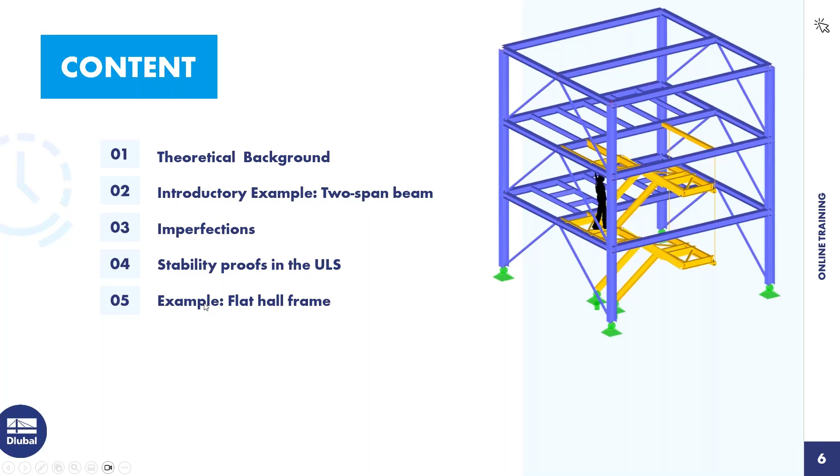So, the content for today: first I'll say something about the theoretical background. Then we start with the first example, a simple two-span beam. I'll say something about imperfections, geometrically nonlinear analysis or second order theory, and so on. Then I'll talk about the stability proofs in the ultimate limit state design. And we'll finish the online training with the second example, a flat hall frame.

Before I come to the products for design according to Eurocode 3, I have one question for you: How much experience do you have in steel design?

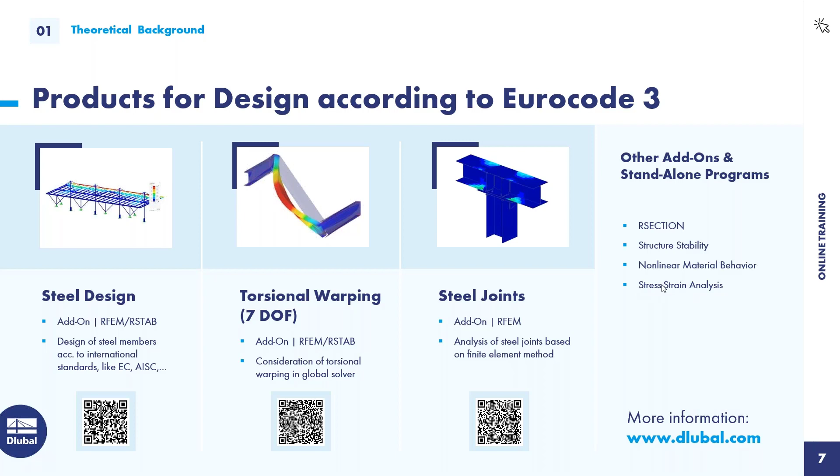Okay, a little insight into the whole safety concept in steel construction. The actions should always be smaller than the resistance. In addition, we have certain coefficients to take into account depending on the type of proof used. For example, for the stability analysis there's a different safety factor for the basic standard and the national annex of Germany - just consider the national annex of your country. But I believe in most cases it's the standard factor from the Eurocode.

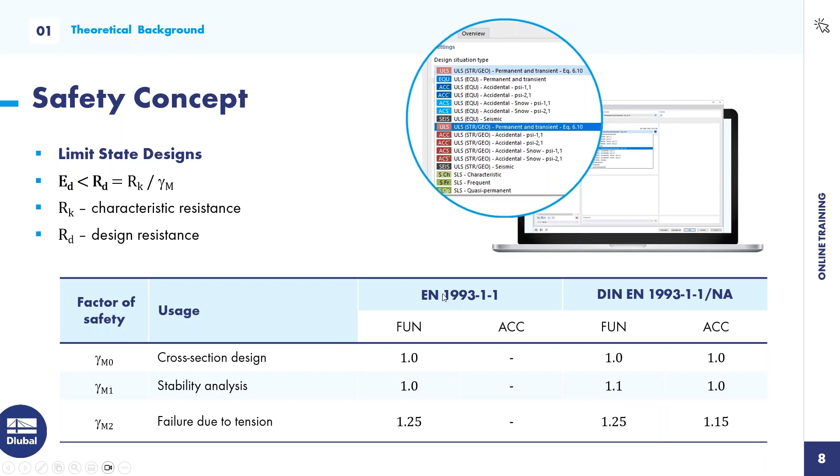Okay, then that's quite important. I will also ask you later, in the poll, about elastic or plastic global analysis. Whether an elastic or plastic calculation is possible always depends on the cross-section.

There are 4 cross-section classes. Let me introduce them. Cross-section class 1 has a high rotation capacity. This allows a plastic structural calculation, for example plastic hinges can be taken into account. Usually you won't do that - it's not so often used in practice.

In cross-section class 2, the cross-section resistance can be applied plastically. It's an economical method, but also somewhat more complex in the calculation when you use the plastic global analysis. But as I said, it's not often used - just consider that the cross-sectional resistance can be applied plastically.

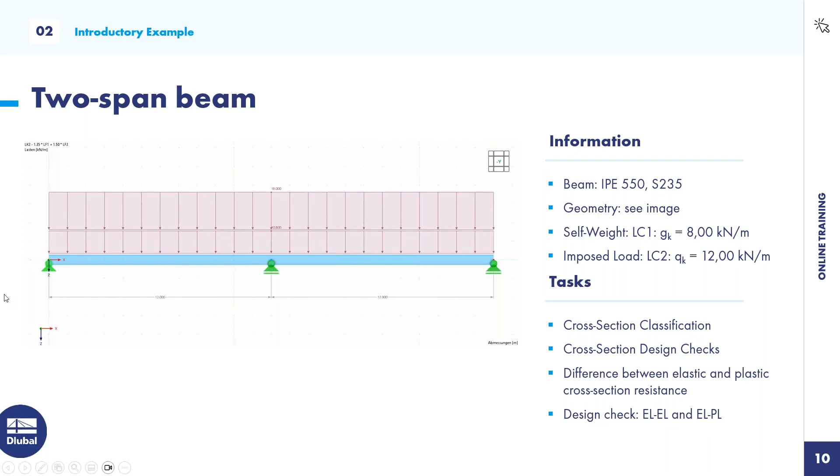Okay, let's turn to RFEM 6. I create a new file here, left above, File New. So the model name is two-span beam.

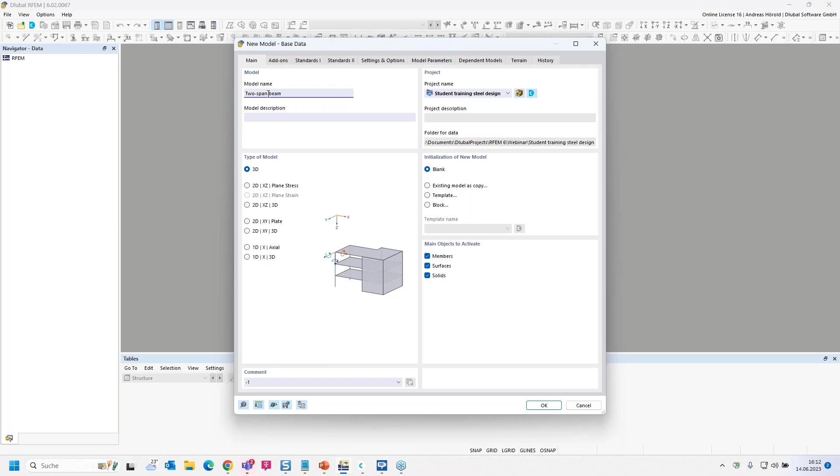I use the 2D model, that's enough for this example. It's only one beam, plane stress.

Then I activate the add-on steel design. Standards, okay, I checked the German National Annex. You can see there are also different standards available for the load case classification. I select the Eurocode and the German National Annex. The same for the load wizards, but we don't use any load wizard in this example. Doesn't matter. Then here the different standards, the international standards, as I mentioned, I use the Eurocode and the German National Annex. That's all.

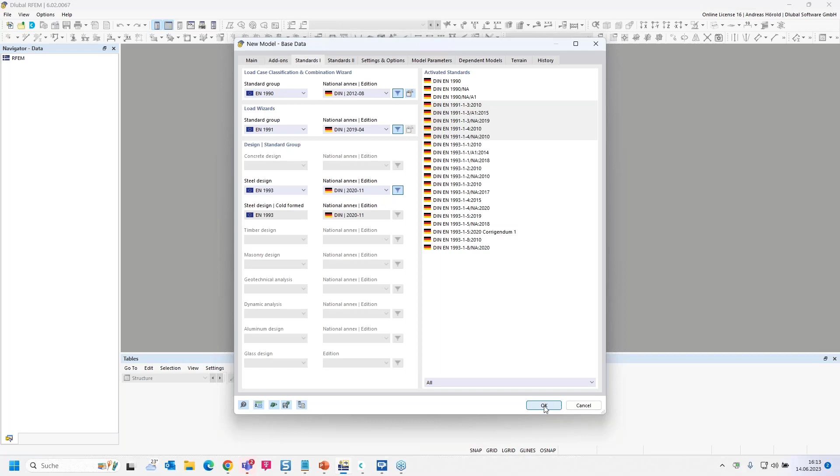Then I change the work plane or the visibility view in reverse Y direction. Zoom a little bit in. Okay, the grid, we can check the grid.

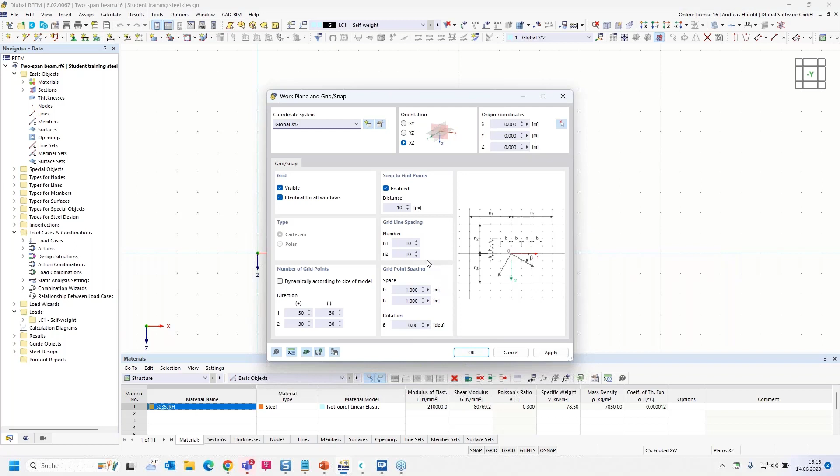The space is 1 meter, here at the bottom, grid. I open the dialog, and the grid of 1 meter is okay.

Okay, then left above, new single member. Beam is okay, then we have to define the cross section. There's already an HEB 300, and we change it with input from section library. We open the library.

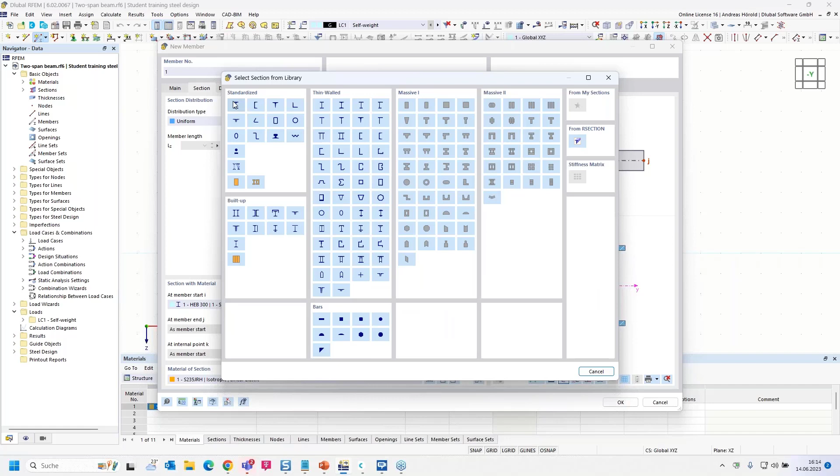Standardized, left above. And I choose, as I mentioned, for example, this one, IPE 550.

And I need to select the material. There's already S235 selected, but I open also the library.

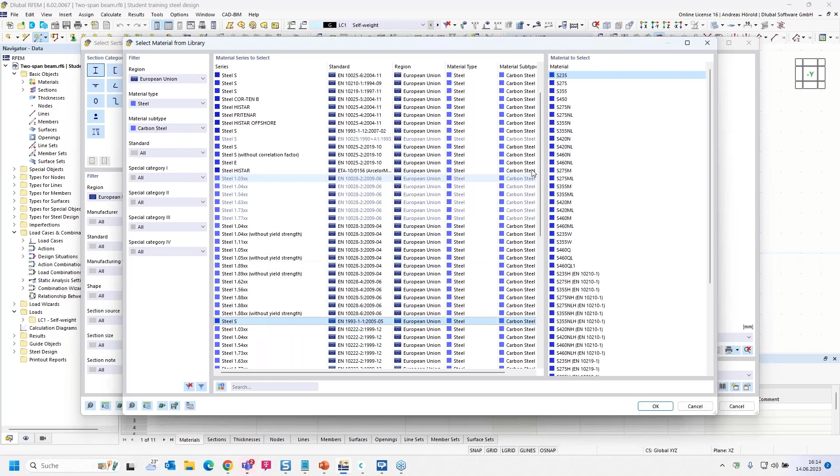So European Union is okay, steel, and I choose any steel that I want, or I check on the left side carbon steel and the simple steel S235. Okay, so that's all.

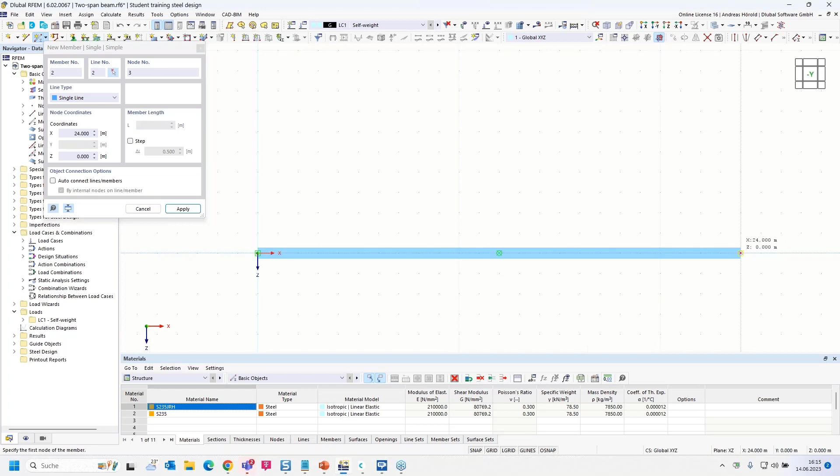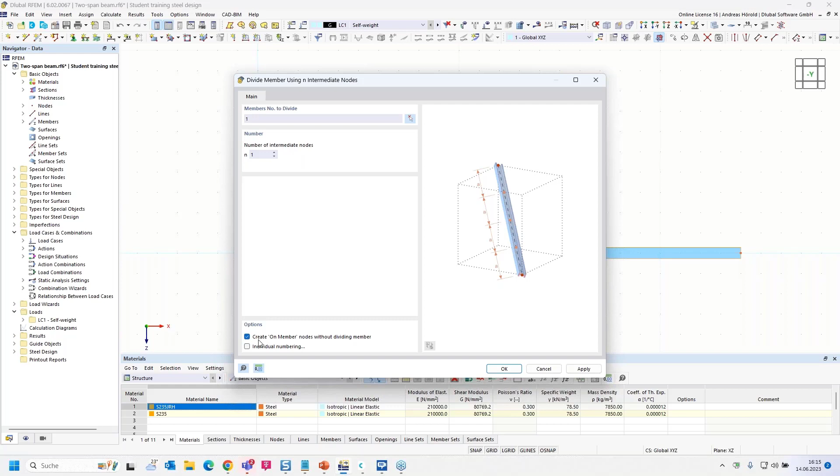So now I create the beam, the whole beam, 24 meters. And I divide the beam here in the middle with right click on the beam, then members, divide member in intermediate nodes. One node is okay, and I don't divide the member, I will only create a node on the member. That's why I check create on member nodes without dividing the member.

Okay, so that I can apply a support here in the middle. So we start with the first support here, left above, assign nodal support. I click on it and let me check the proposed nodal support.

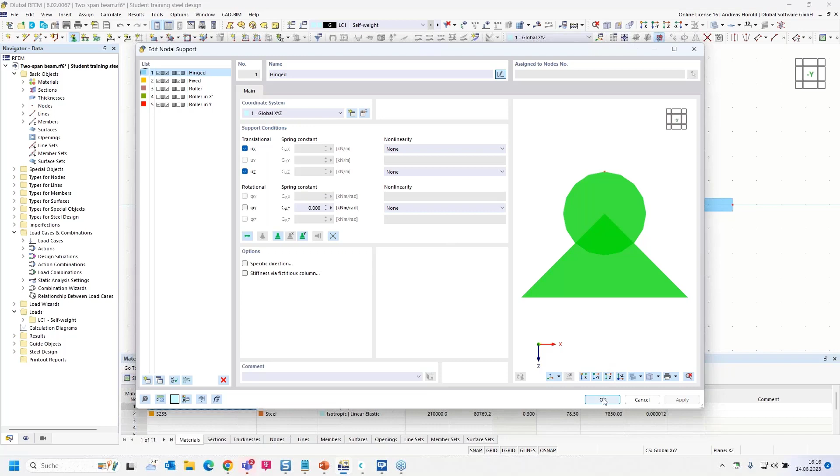Yeah, that's okay. Translational in longitudinal or in X direction and in Z direction. Okay.

This one, okay, it's very small, that's no problem. I right click on it and increase the size of the support. It's only a display setting.

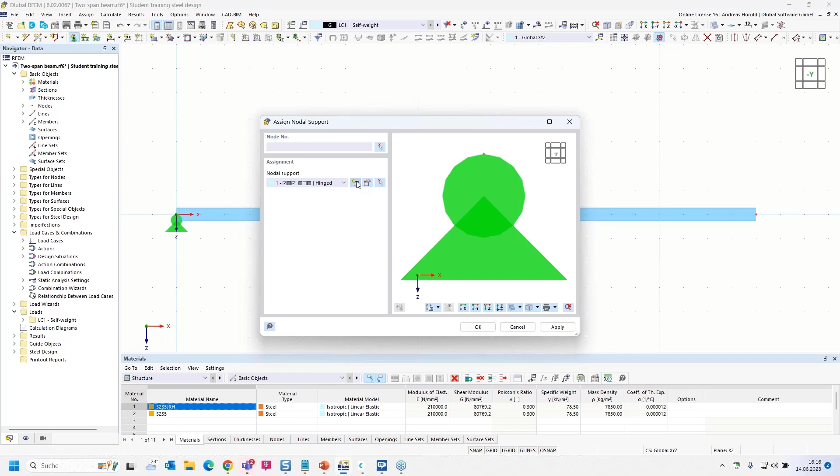So then the next supports, I define a new support. Should be fixed in Z direction, but not in X direction. Okay, and I select this node and this node. Okay, we finished the beam.

The self-weight load case is already created. I enter a new member load here at the top, new member load. 8 kilonewton per meter in Z direction.

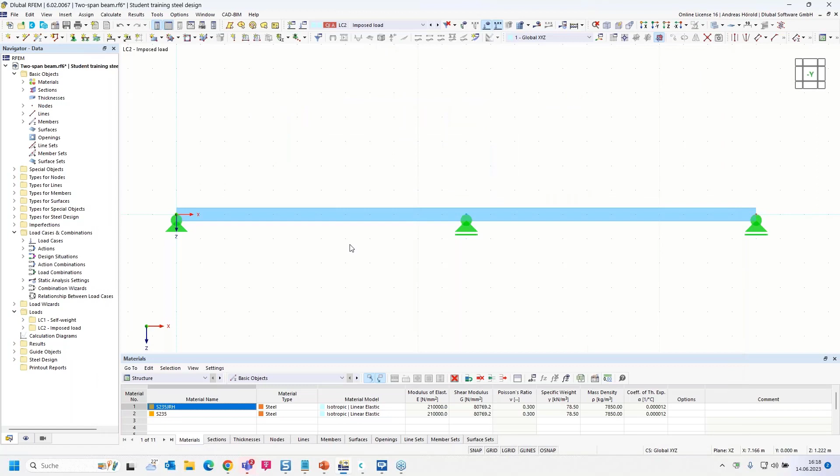Okay, so then I enter the next member load. 12 kilonewton per meter in Z direction. Okay.

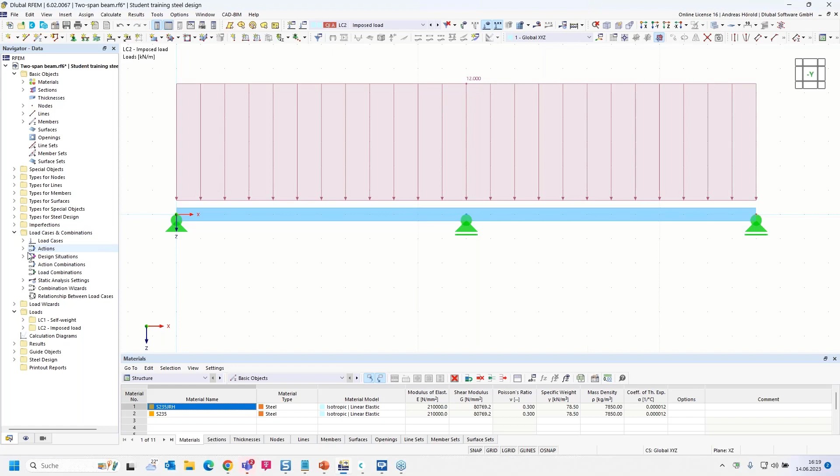So that's all, we finish the beam and the loads. We turn on the left side in the navigator data. We open the design situations.

Now we open the same dialog. Those are the load cases. Those are the base data, the standard group, and the national annex. And we would like to use also the combination wizard.

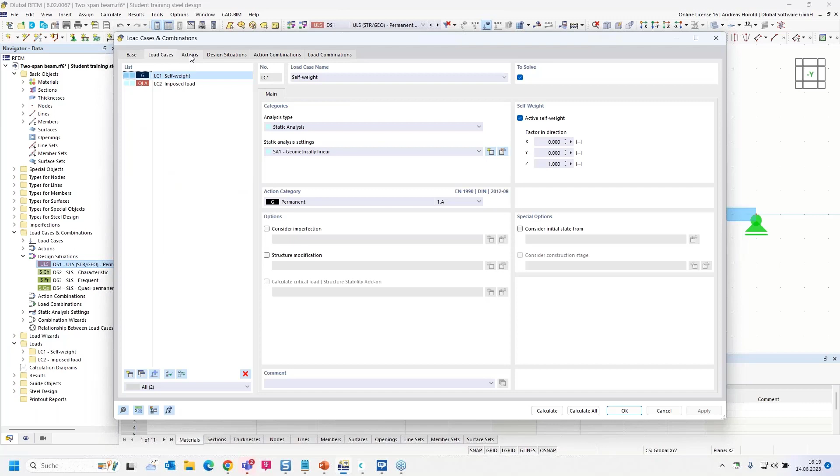So we have got two actions and those design situations. We would like to do only an ultimate limit state design. That's why I select with the Shift key all the three serviceability limit state design situations and delete them.

Okay, the steel design is already checked, that's okay. Then there are action combinations and the load combinations, only two load combinations. So then I can calculate all.

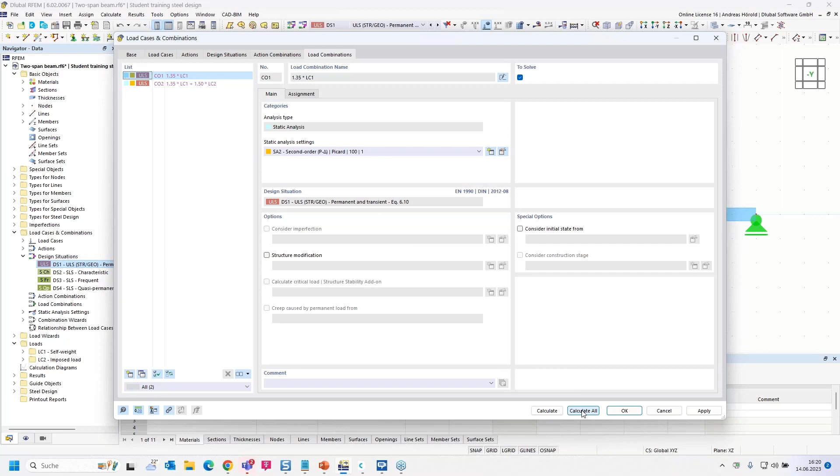So then let's take a look at the results for the ultimate limit state design. Here on the left side, you can see the global deformations, minimum and maximum. Now we have got two combinations, so I can check the envelope values, and I can also display only the maximum values if I want.

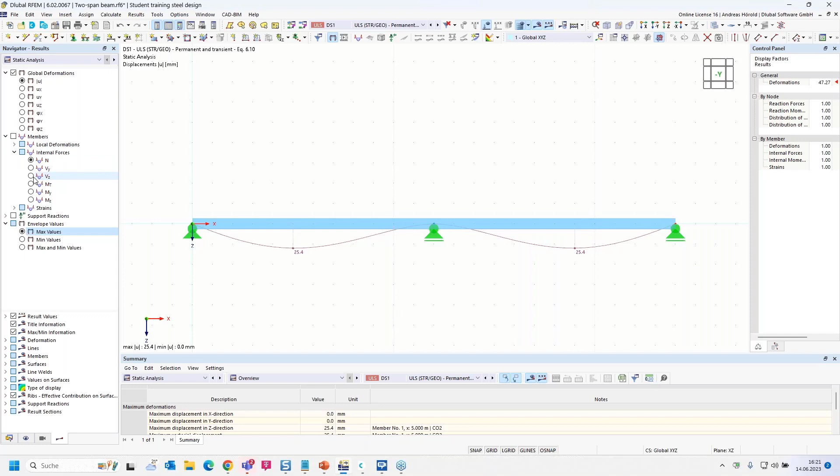So then members, let's take a look at the internal forces, the shear force, and the moment My. Okay, that looks quite good. At the bottom, we check the steel design.

We can see the message here: no effective lengths or boundary conditions are assigned, the stability design could not be performed. We want to do only a cross-section design. Now we assume the beam is supported in horizontal direction, and we do only a cross-section design.

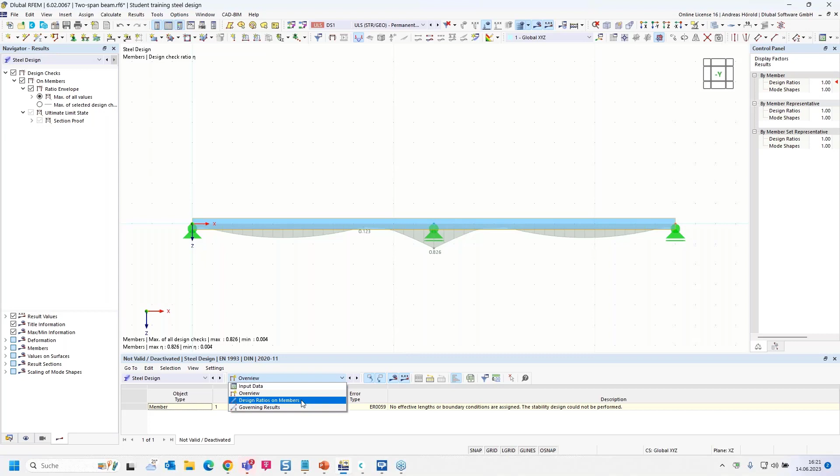So that's why we go to the design ratios on members. You can see the two checks, the section-proof shear on Z-axis, and bending about Y-axis. So then you can double-click on such a line, or you can open the details with that button here. I check the button, and then you can see all the equations from the standard.

Also for the shear design check ratio or design. And you can see the section classification. It's class 1, that's why a plastic design, you can see that here, is possible. Plastic design also for the section-proof bending about Y-axis.

And you can also print such equations with the hint where you can find it in the standard. With that button, print to the printer, to PDF, or to the printout report. Students request a detailed presentation of the proofs, and that's possible. Okay, class 1, plastic design.

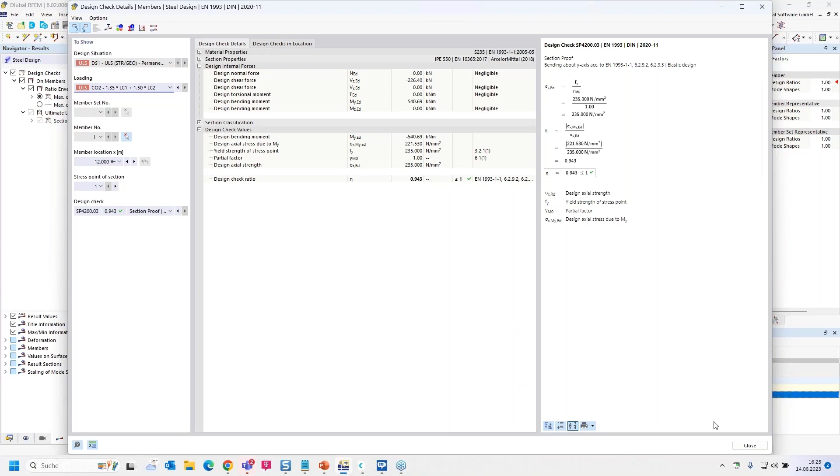So we have now learned how to carry out a cross-section check and how to take the elastic or plastic design into account. At first we did the plastic design, then the elastic design, as I mentioned, voluntary. And in addition, we now know how to display the design formulas and compare them with our own manual calculation.

So let me start the last poll for today. The question is: the elastic-elastic method applies to all cross-section shapes and can therefore always be used. Just check the right answer.

Now remember that we did at first a plastic design and then we did an elastic design, voluntary. Okay, then I will close the poll.

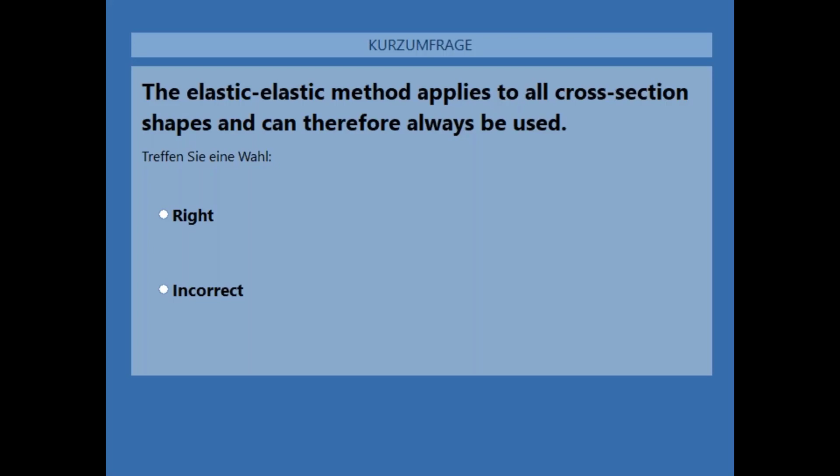Most of you checked the right button or gave the right answer: the design can always be done with the elastic method.

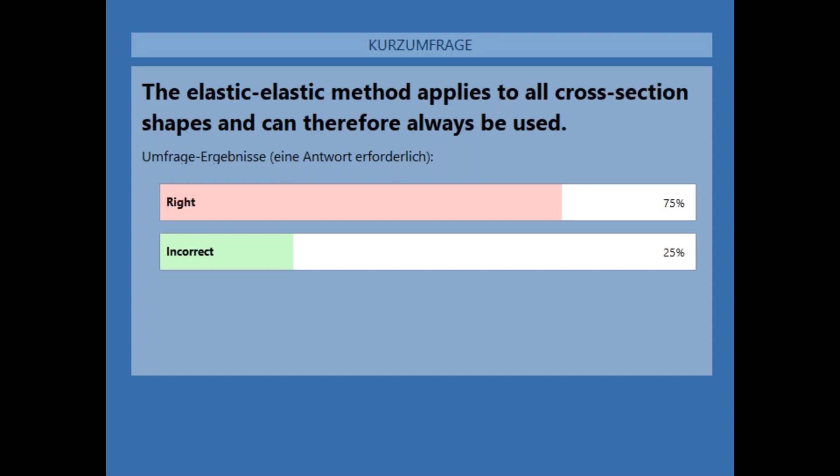Okay, let me go back to the slide. You can see elastic is always possible, but for cross-section classes 1 and 2, you can do or consider the plastic cross-section resistance if you want. But elastic is possible for all.

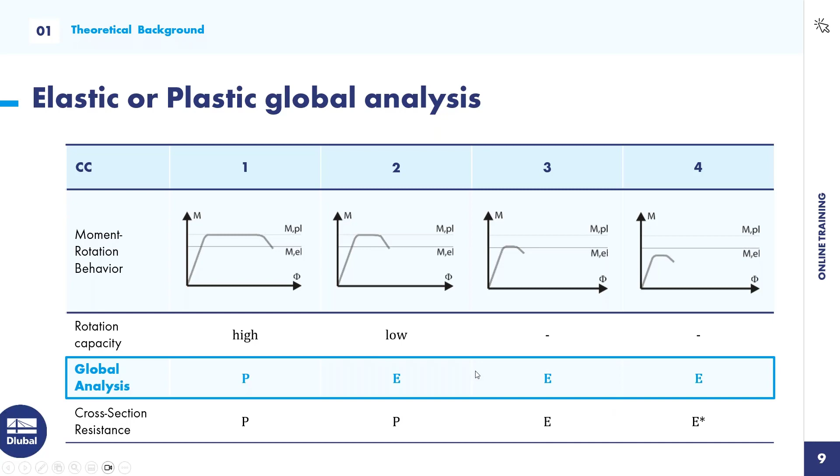So then we turn to the next topic: effects of deformed geometry of the structure. In the first training course, Introduction to Member Design, it was learned how the results can differ between the calculation according to the first order theory and the second order theory. Geometrical linear analysis is the equilibrium formation of the undeformed system, and the second order analysis is the equilibrium formation on the deformed system. In the example, you can see it on the right side.

In the example of the cantilever column, this effect can be seen very well on the basis of a slender column on the left side and the compact cross section. In the case of the slender column, the increase in the bending moment at the foot point is much larger than in the case of the compact column, if one calculates according to second order theory.

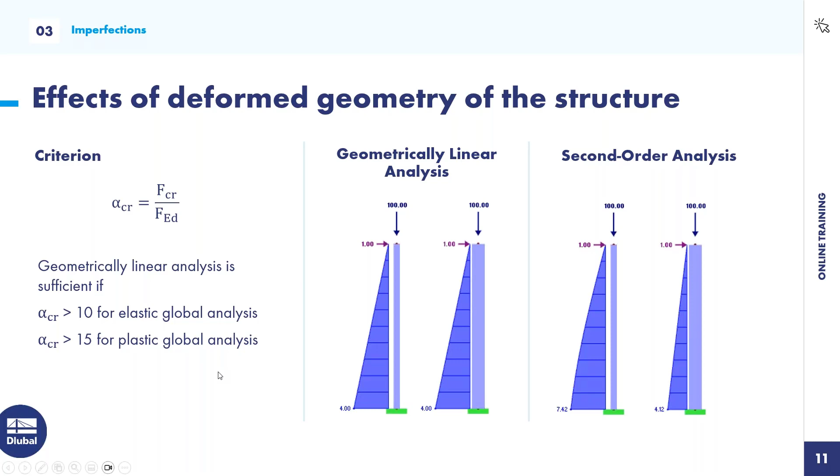And 15 is the value for plastic global analysis. So then...

Equivalent geometric imperfections. Imperfections are also closely related to this topic. Here we have the imperfections in Eurocode 3, where these are generally grouped together as equivalent geometric imperfections.

Now, maybe at first, what are imperfections anyway? Imperfections are production-related deviations in the model geometry and the material properties. On the one hand, there can be real misalignments in classic hall constructions or tolerances in production, especially when rolled sections are used.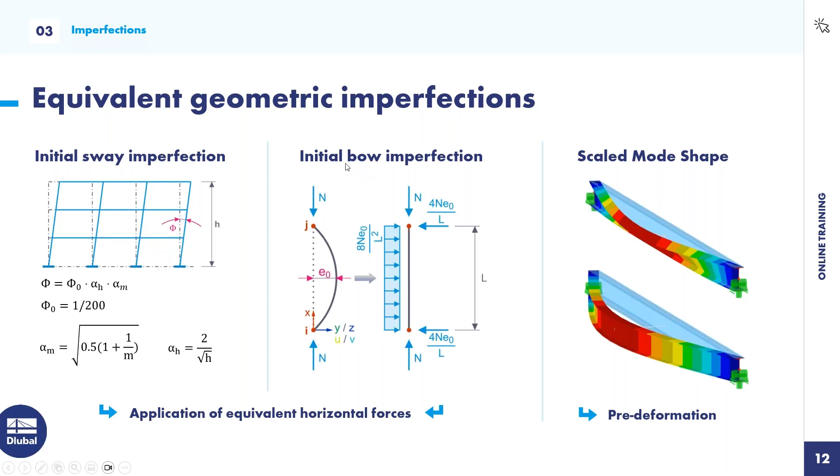So then the next slide, stability analysis. When designing in RFEM, 3 different stability analyses are carried out. On the left side, you can see the classic flexural buckling as a lateral deflection. Then torsional buckling in pure compression, and lateral torsional buckling as a combination of the two previous proofs.

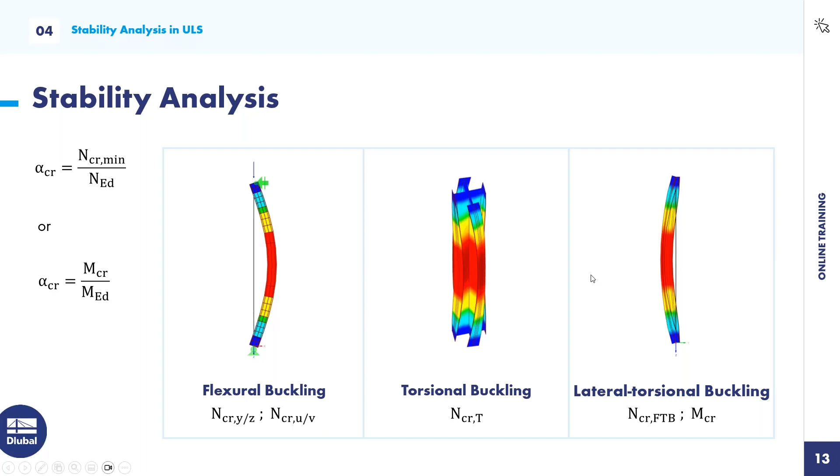So in the next example, we will first start with method C and then use method B.

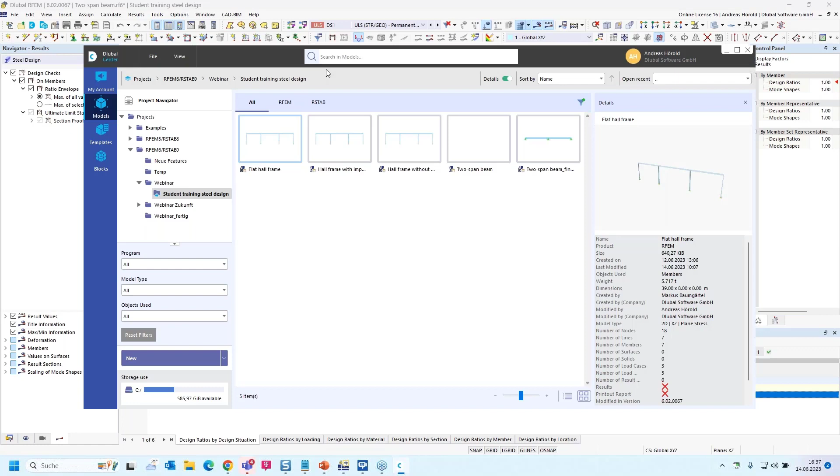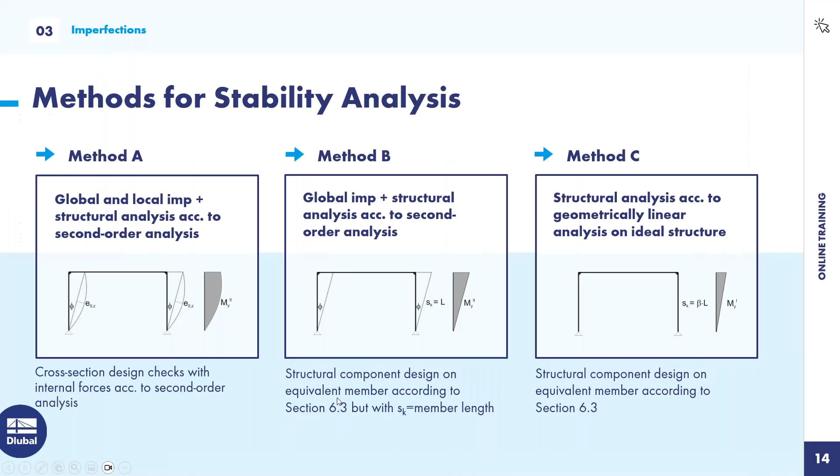I turn to RFEM. I already prepared the model. Let me open it. I have to open the control center. So that's the prepared model. Let me turn back to the PowerPoint slide, where also the model, the cross sections, you can see them in the image.

That's the dimensions. There's one real frame here in the middle, then a connected horizontal beam and a column. There are hinges at the end of this horizontal beam, and the same is on the left side. So then 3 load cases: self-weight, snow, and wind. And the tasks for this example are to apply imperfections and the stability analysis according to method B and C. We start with method C, and then we apply imperfections and use method B.

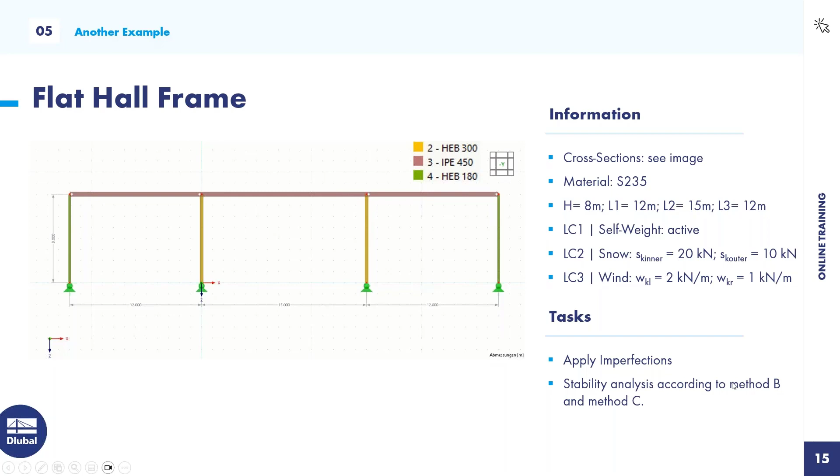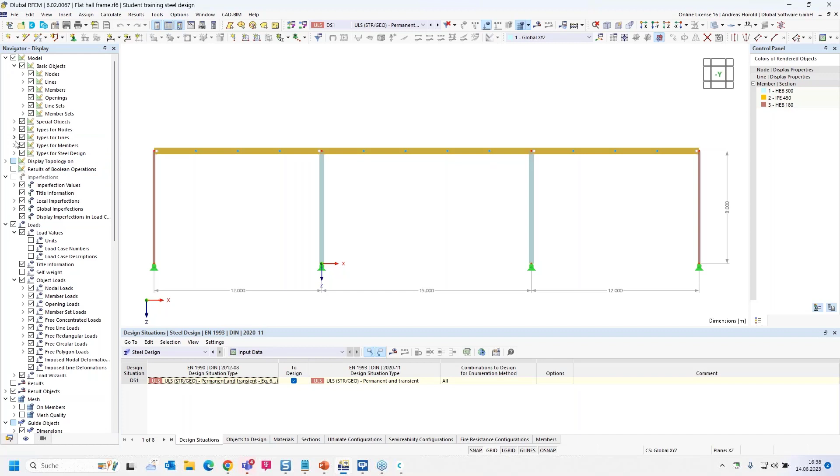So let's turn back to RFEM. So that's the model. I go left at the bottom on the navigator display, and I check for the members. So the section name, then you can see the different cross sections.

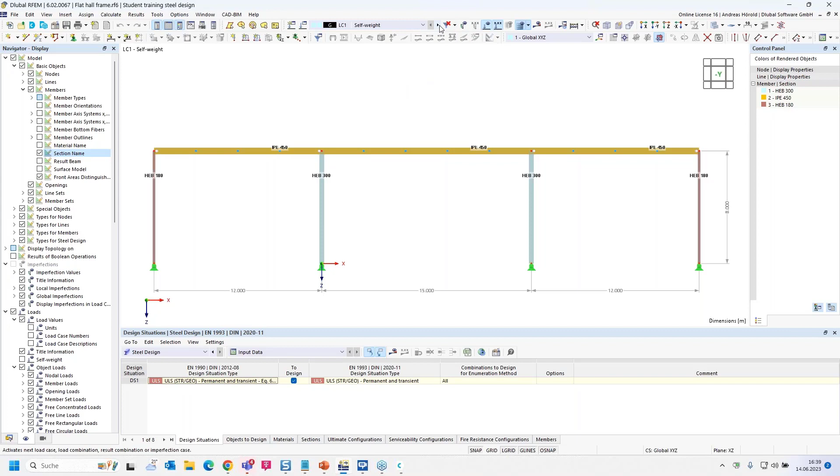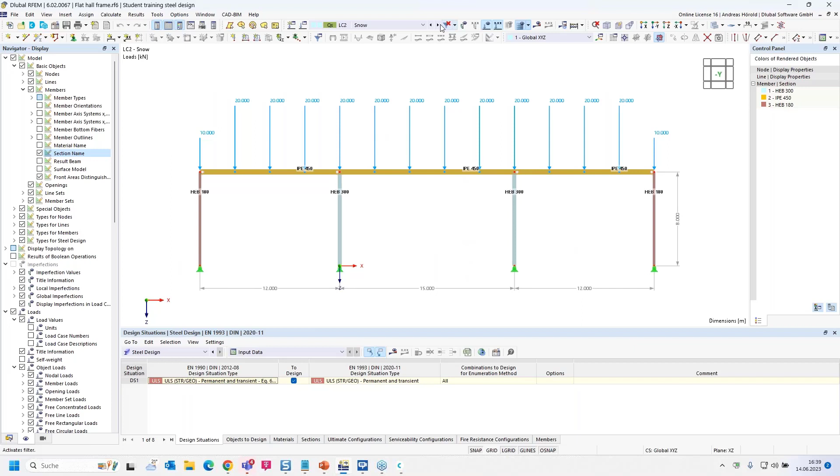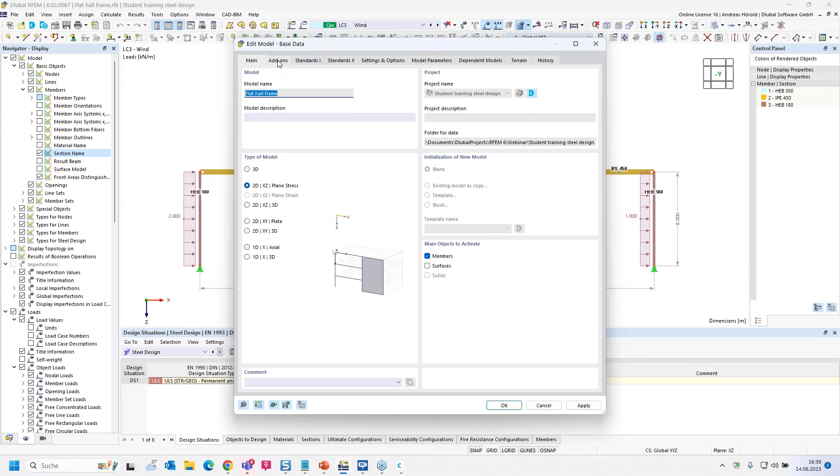So then we turn left above to the base data. Again, the model 2D, plane stress. Then the add-ons: I will use the structure stability add-on and the steel design add-on. Standards, as in the first example, I use the Eurocode and the German national annex. Just select your national annex if you want, or the standard European annex.

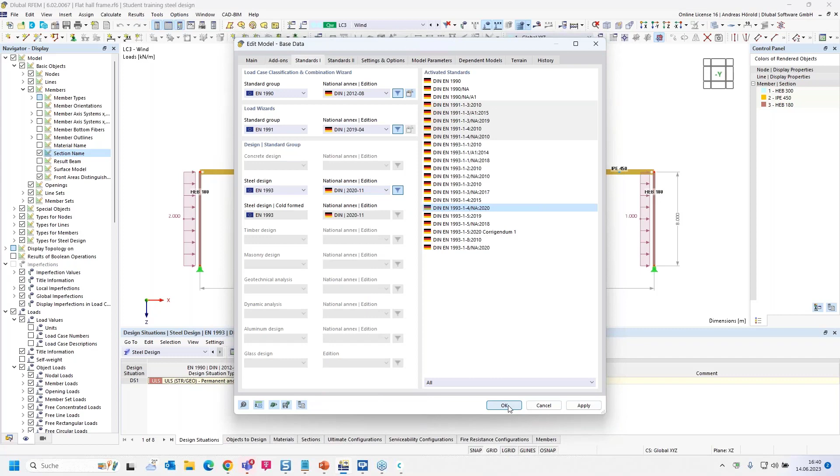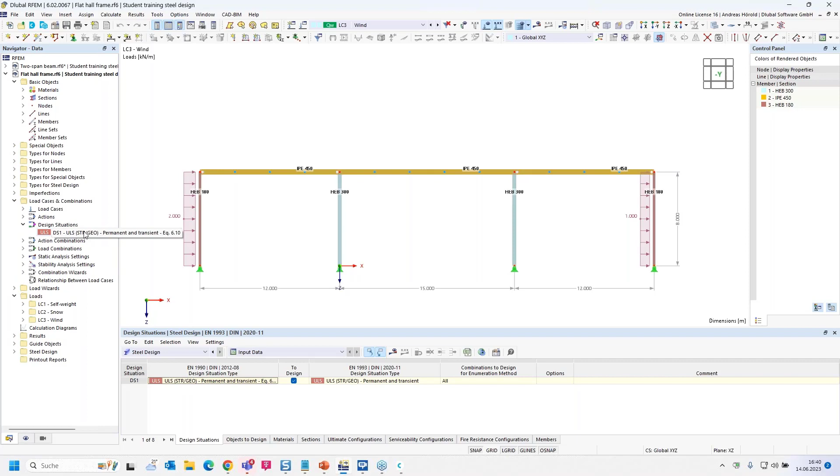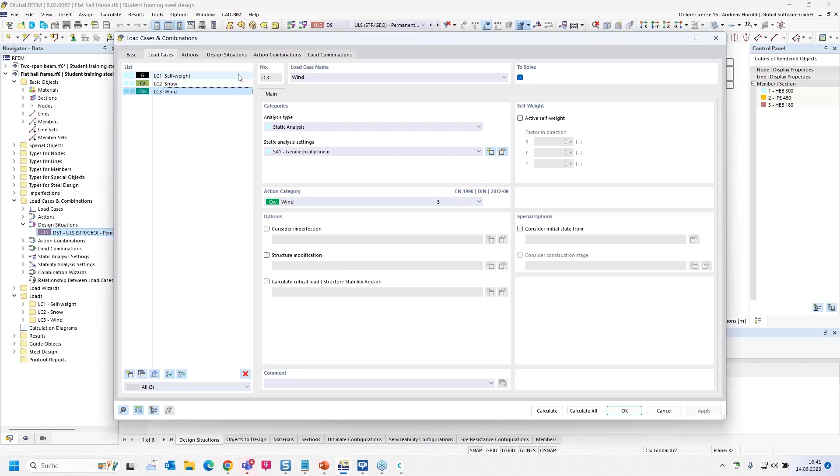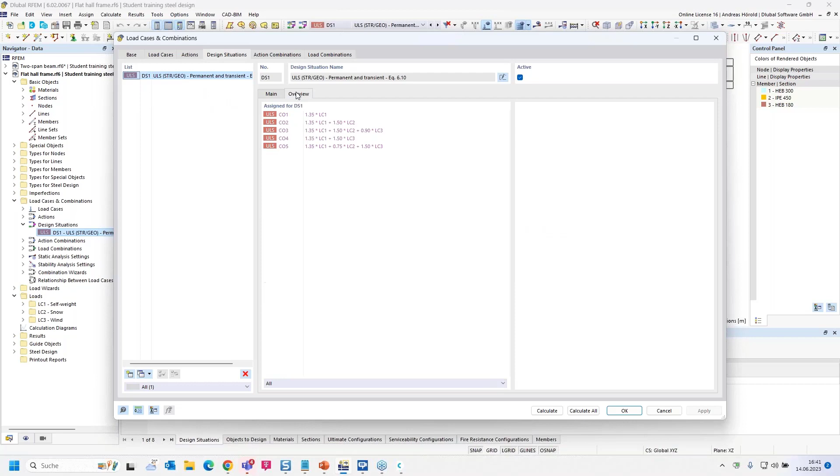So then we will use the add-on structure stability. How to do that? I go or turn in the design situation. There's only one design situation, ultimate limit state. Steel design is already checked. We can go through all the dialogues here quickly. Standard, the 3 load cases with the right action category, 3 actions, the design situation, and then the load combinations. And the design, also 3 load combinations, and the design situation contains all 5 load combinations.

Okay, and in the first step we would like to do a geometrical linear analysis, and I open it. I can check this button here to edit it. So, and I would like to do a stability analysis. And I can calculate the design situation.

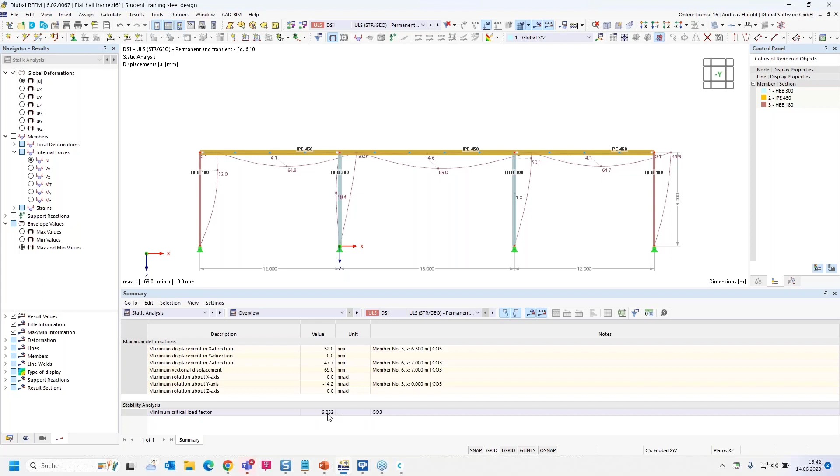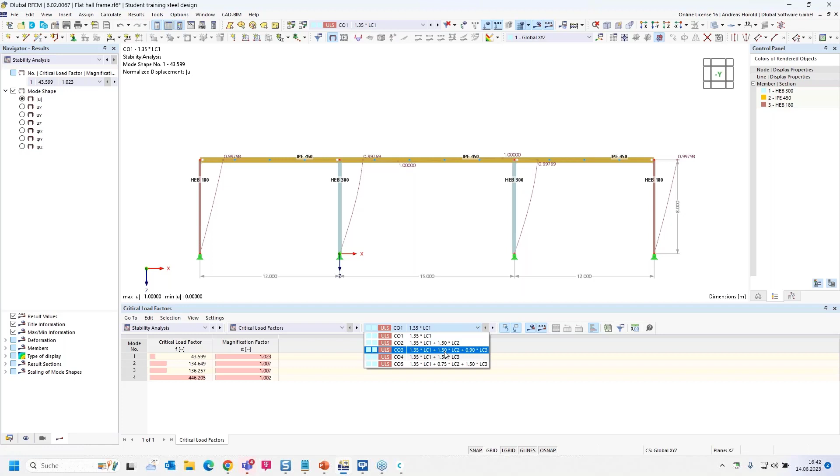And at the bottom you can see the effective lengths. So let me increase the window. Yeah, for example, effective length factor 3 for this column. Yeah, almost 3 for this column. 1.73, I would say, for this column, and 1.73 for this column.

Yeah, and in the first method, method C, we would like to apply the effective lengths. Now we would like to assign it to the different columns. So in the first step, I select the inner columns, double click on one. Now 2 are selected, and I switch to the design types, and I want to create the effective lengths. So then nodal supports and effective lengths, and I select 3 for the axis Y. Yeah, and that's all.

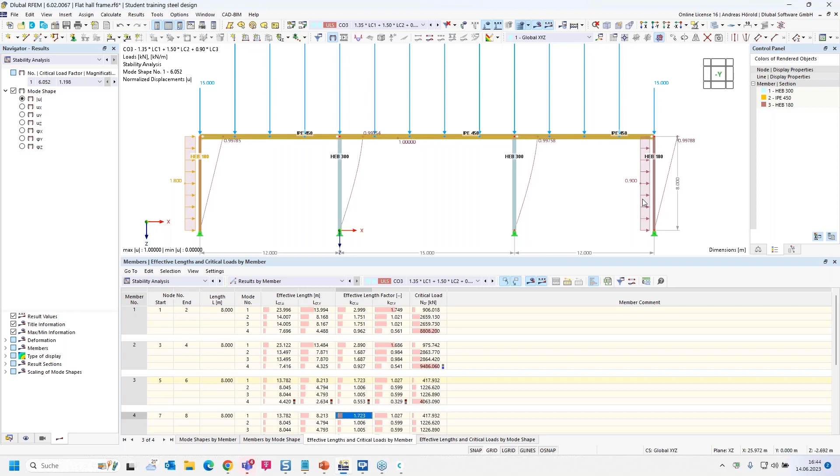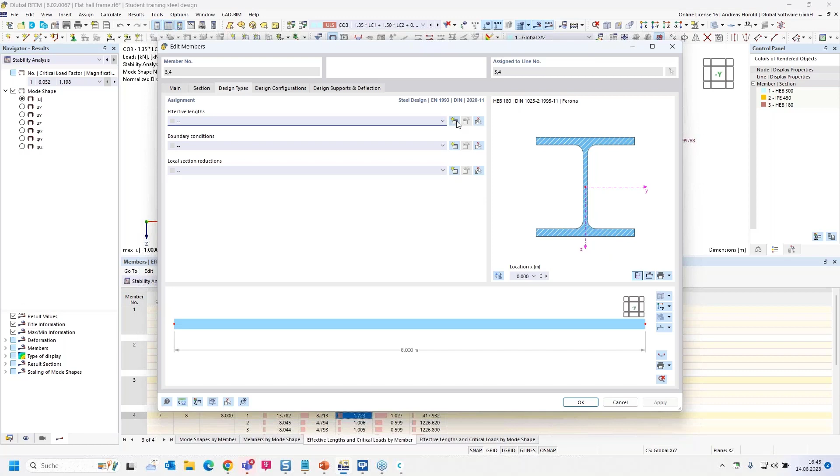So then I select these 2 with the control key. I can select both. You can see the plus here, I hope you can see it. So, and then I double click on the member. The same for these columns: design types, effective lengths. Okay, and 1.73.

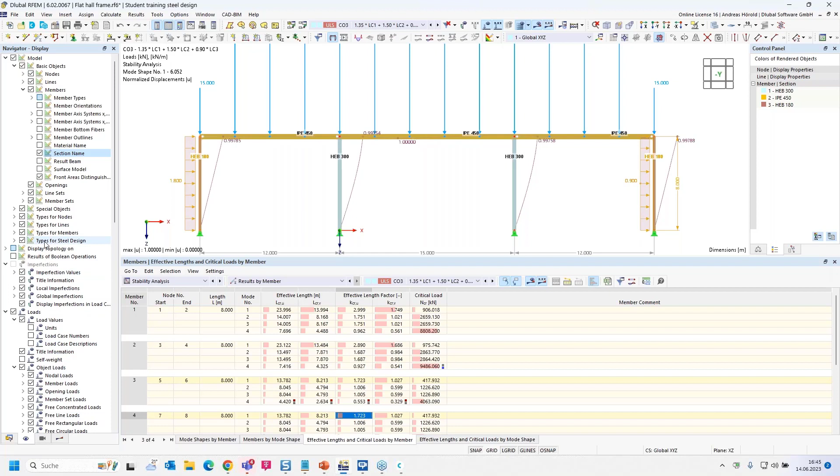So let's check if we did anything wrong. I go in the navigator display here at the bottom, then types for steel design, and I check member effective lengths. And you can see the different effective lengths, and you can compare it with the values in the table. I deselect the loads, and now you can see the values and can compare them.

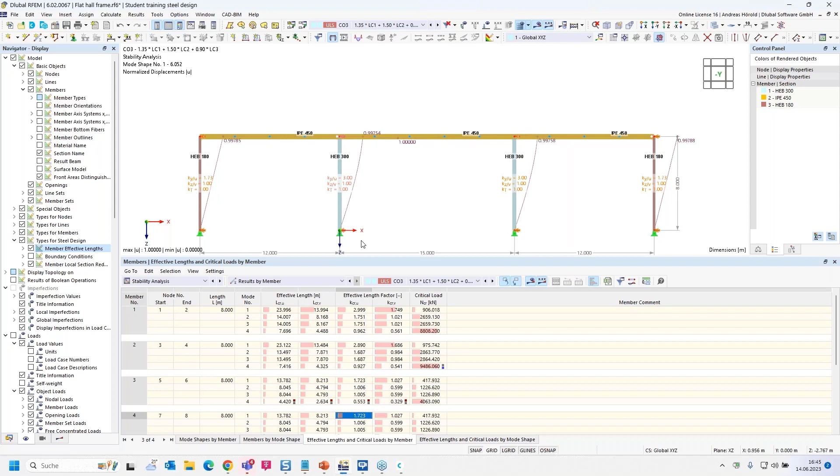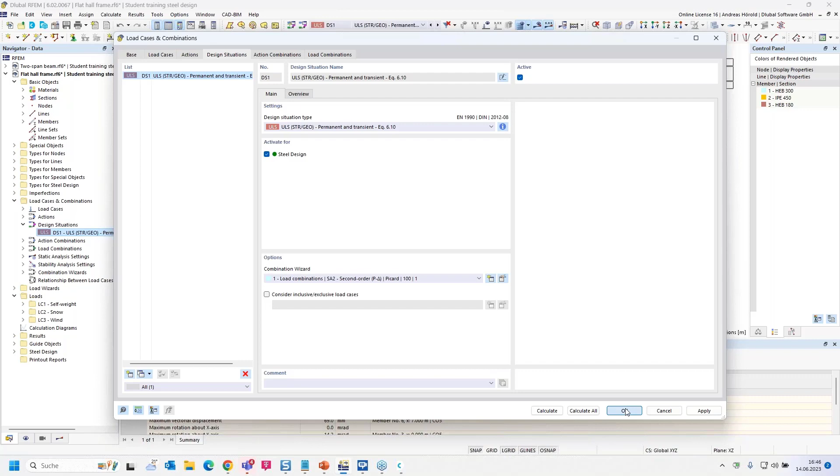Okay, before we run the calculation, I go back to the design situation. So, and now I select the second order analysis. Yeah, as I mentioned before, to do the design for flexural buckling you could apply the geometrical linear analysis, but we want also to do a design for the lateral torsional buckling. That's why we selected the second order theory.

So, and to consider the lateral torsional buckling, I select the 3 horizontal beams. That was wrong, just a moment. I press the Control key, double click, now 5 and 7. Then, or let me do it another way. I double click only on the middle member, then design types.

I would like to show you an interesting effect. So I go directly to the effective length. I create another effective length. So then I go to the nodal supports and effective length. So, and then I use that button here, select member or member set. The program detects the intermediate nodes, and I would like to check or fix it in Y direction, in direction of the weak axis.

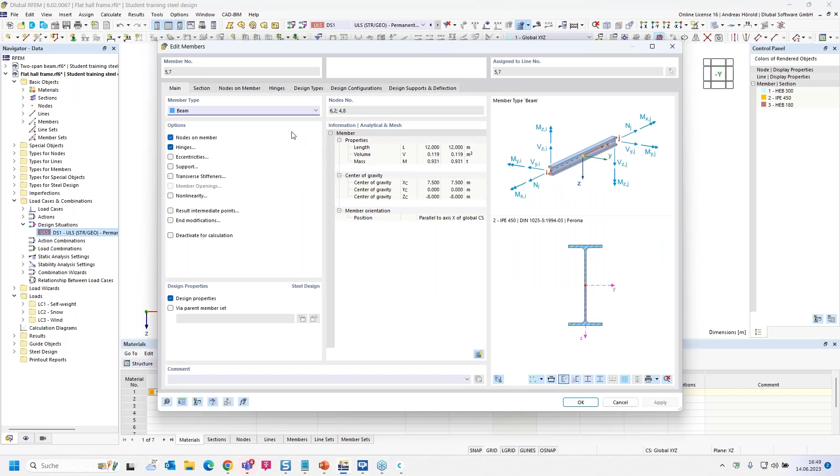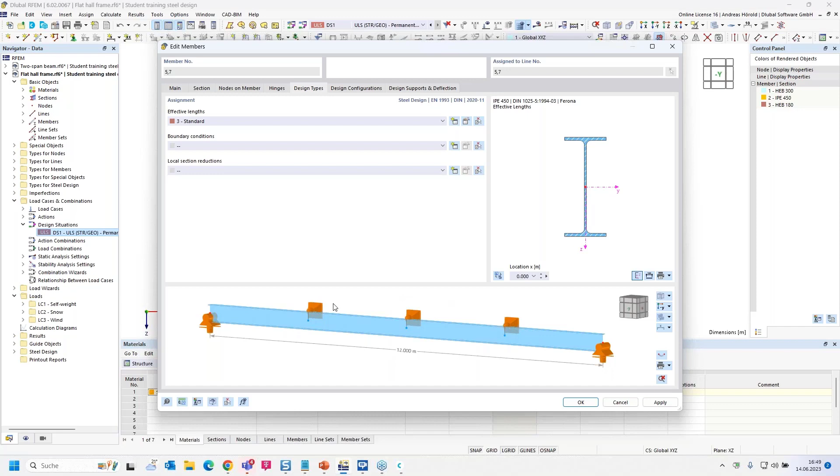Then design types, design type number 3. The program detects automatically that there are only 3 intermediate nodes, and it considers the same horizontal supports, although there are only 3 supports. The inner beam has got 4 supports. Now we have got only 3, but the program detects that automatically. So now we can run the steel design.

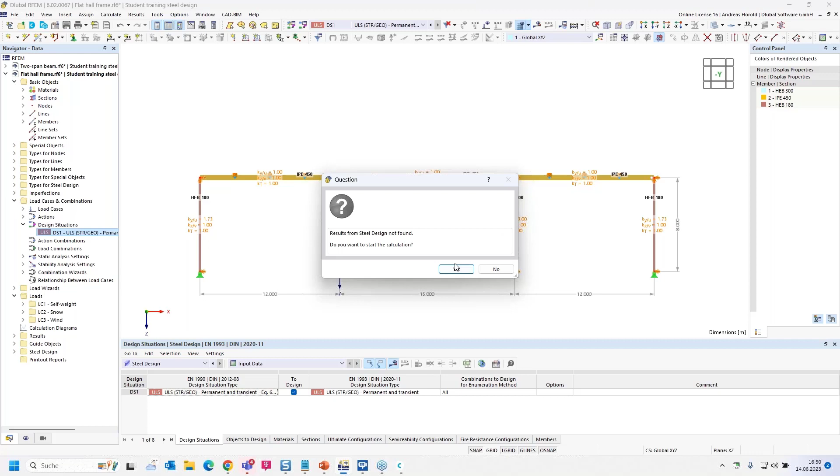Okay, so let's take a look at the section proofs. The maximum design ratio is 84%. Bending and buckling about the principal axis.

Let's double click on that line, and you can see on the right side the formulas, to hint where you can find them in the standard, and so on. Okay, I can leave the dialog.

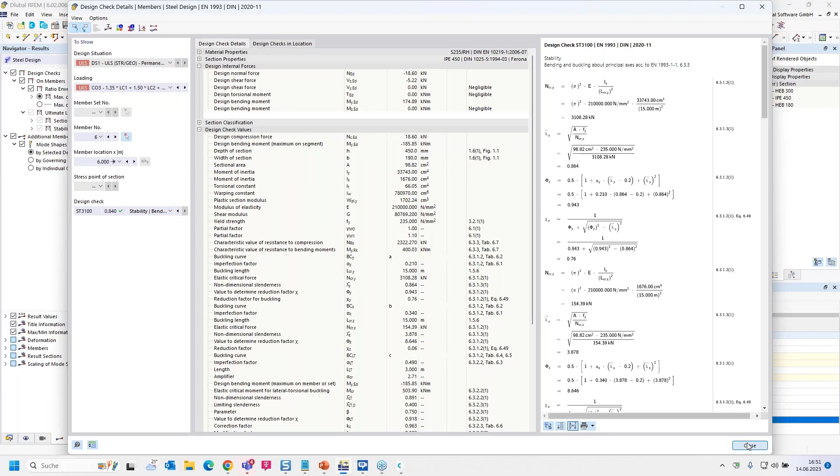Yeah, this was the classic structural component method, method C without imperfections, but effective member lengths. And now we want to examine the model using the approach of global imperfections and the structural component design, which means method B. To do this, we change the buckling lengths or the buckling length coefficients of the supports back to 1.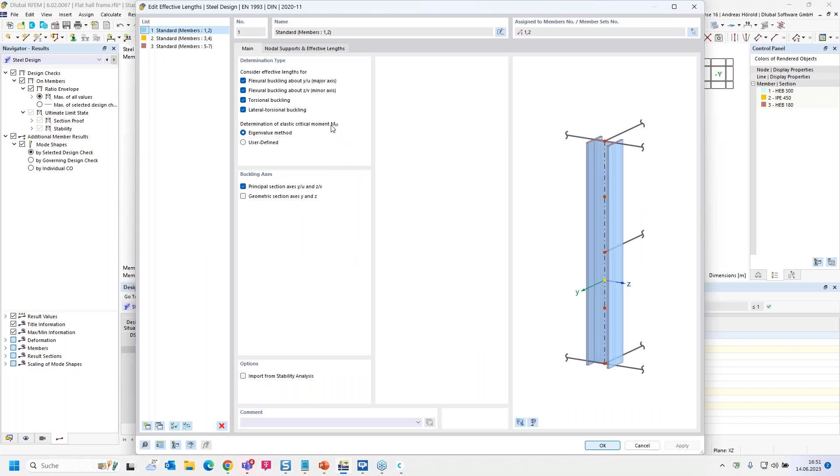The buckling lengths of the columns, I mean. So I select them, this one and this one. So then I change it back to 1, and for this one also back to 1.

Okay, yeah, the results are deleted. You can see the buckling length factor of 1 for all columns. So then above, you can see the imperfections, new member imperfection. I click on it. Imperfection case is created automatically.

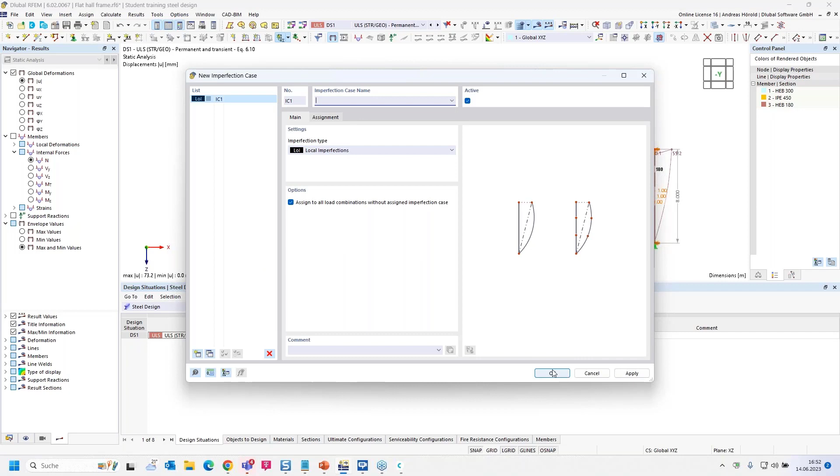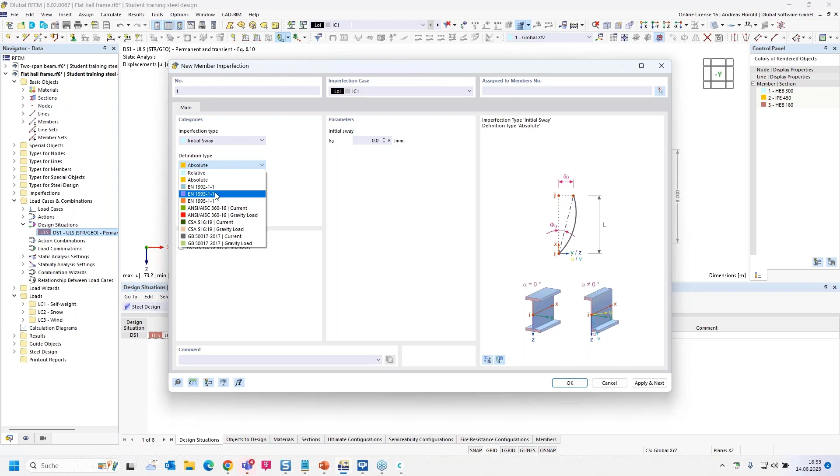So now we want to apply initial sway. You can also see initial bow, but we use method B, that's why we use the initial sway. You can see the different definition types and the different standards. We use Eurocode 3. In imperfection direction, in the direction of the strong axis in our case, in Z direction.

Okay, then we have to measure the structure height with that button here. So member height should be 8 meters. Okay, the program takes it over. The number of columns in one row is 4 in our case. And you can see the reduction factors and the initial sway are created automatically.

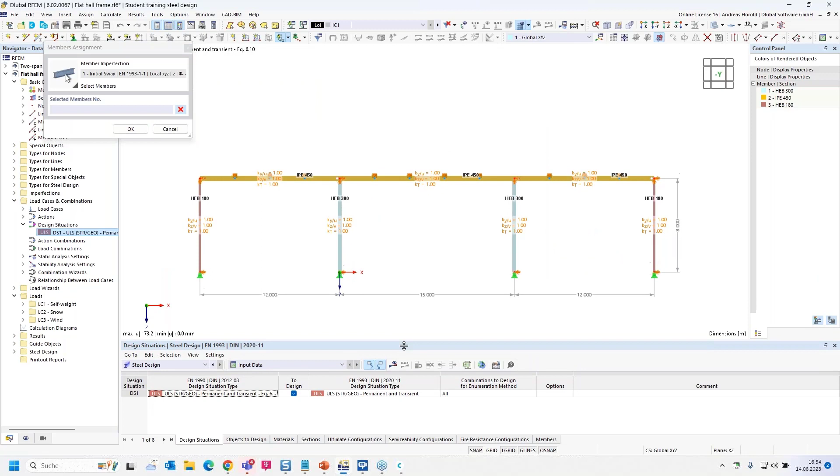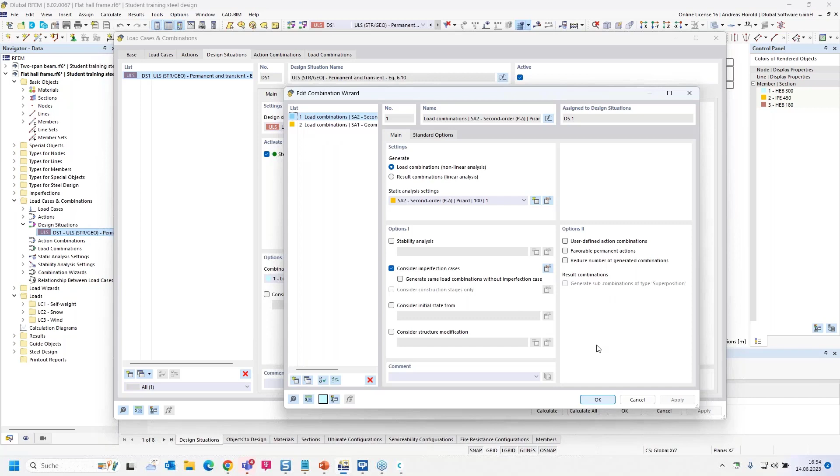That's all. We only have to turn to the design situation again, and we need to check if the imperfections are checked on. Yeah, we can edit the setting here. Yeah, it's checked on. Consider imperfection cases, that's quite important.

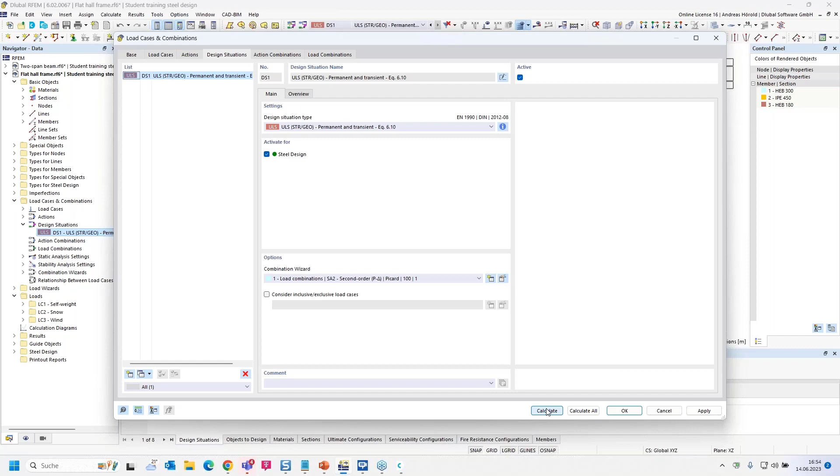So, and we can run the calculation. So we need to perform the steel design as well. So I increase the table here. So, and you can see the same design ratio.

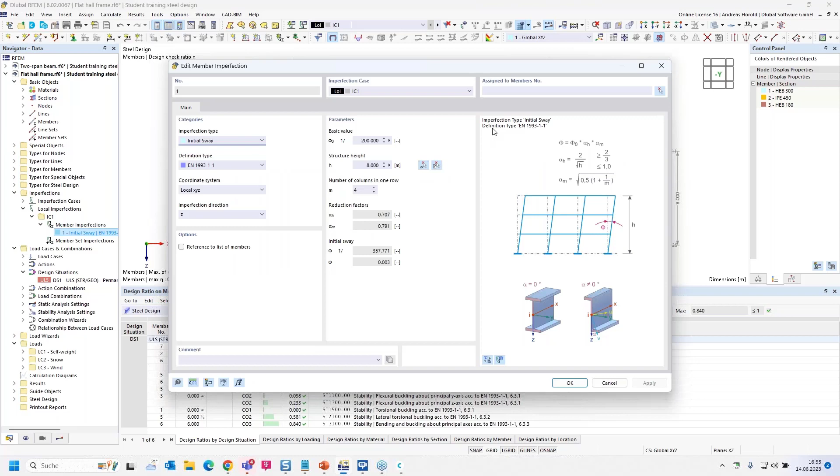We can take a look. Okay, no, I did something wrong. I didn't select the imperfections. Where are the imperfections? Just a moment. Imperfections, I didn't assign them to the different members. I created the imperfection, but I didn't select all the 4 columns. Sorry, my mistake.

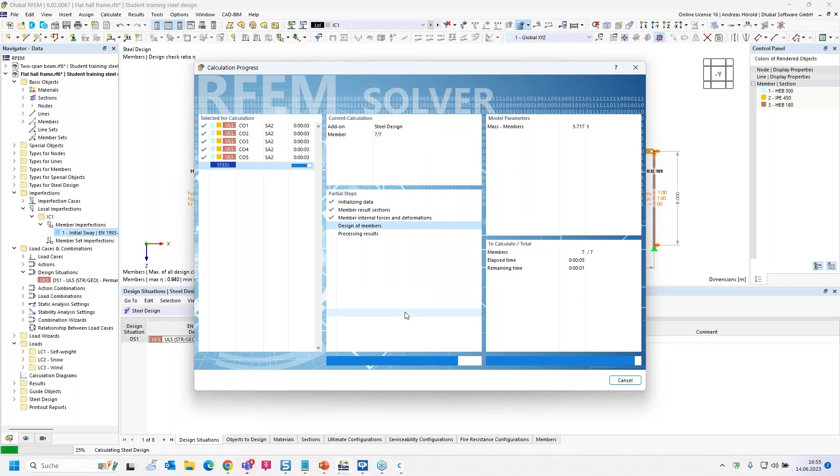We need to run the calculation again. I just wondered where we got exactly the same result. It's almost the same result now for method B. We had for method C 84%, and now we've got 86%. You can see the equations again here in that table. Okay, those are the two methods. We did at first method C and then method B.